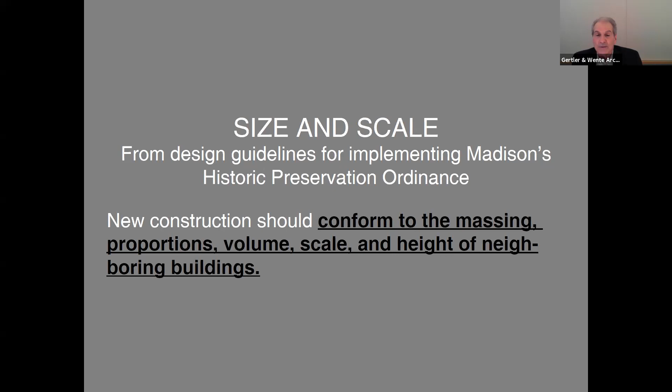When we look at Lincoln Place, we have an image showing a photo montage, taking a picture of each building and putting them to the right scale in terms of spacing between them, from Waverly Place over to Prospect. Our dilemma was that if we're supposed to use Lincoln Place as a jumping off point, we realized virtually no two buildings are the same—no two are the same height, no two have the same materials. It's really a hodgepodge of design for a street.

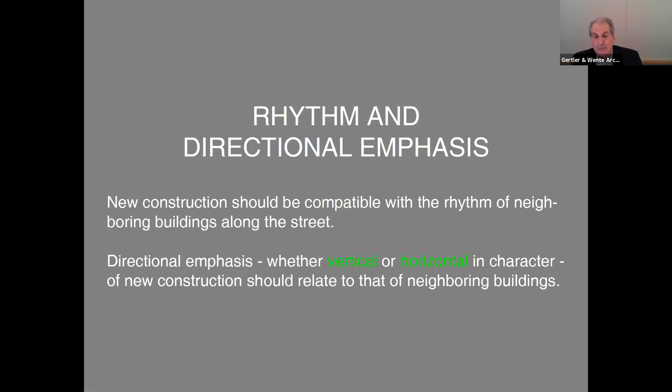So we looked at downtown Madison more broadly, and thought Waverly Place and Main Street were very good jumping off points. New construction should be compatible with the rhythm of neighboring buildings along the street. Directional emphasis—whether vertical or horizontal in character—of new construction should relate to that of neighboring buildings. So we looked mostly at buildings on Main Street, Waverly Place, and Lincoln Place.

We also looked at this on a horizontal band. Most buildings actually have this kind of horizontal banding. This is really historical architecture, where you have a base, a shaft, and then the capital. Most buildings have something like this. You can see buildings like the James Building, and down at the bottom is a very unique building, whose very top has a lot of different kinds of architecture, very different than, let's say, on the top right, the train station, which is just a gabled roof, very simple and clean. But the point is, we took our building and used the same theme, basically having a base, a shaft, and then the capital at the top.

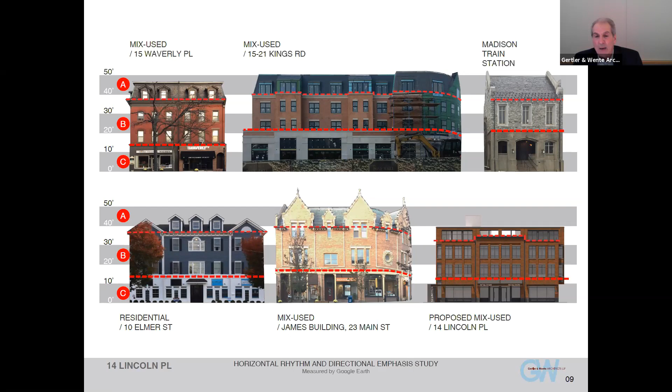Now let's go to other building elements. Window and door proportions, size, design, and pattern of spacing between openings should be compatible with historic treatments of windows and doors in the district.

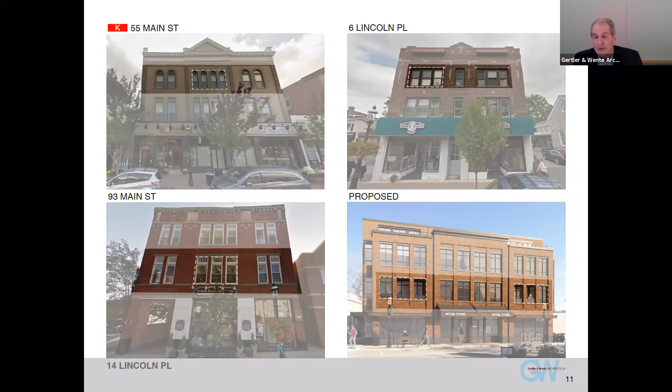So we looked at the basic windows. Most of the buildings in downtown Madison tend to cluster the windows rather than having punch-out windows. They tend to cluster them in groups of 2, 3, or 4. These are just some of many examples that do that. Ours on the lower right does the same thing, clustering windows of 3 on the far right and far left, and a cluster of 4 in the center.

Now, the heights of buildings in downtown. If you look at the overall Google Earth image of downtown Madison, I think most people would be surprised to see the amount of buildings that are about 40 feet and over. Most people think of Madison as a series of 1 or 2 story buildings, and that might be true, but here are about 15 or 16 buildings that are way over that, at least 40 feet and above. We just want to bring that to your attention.

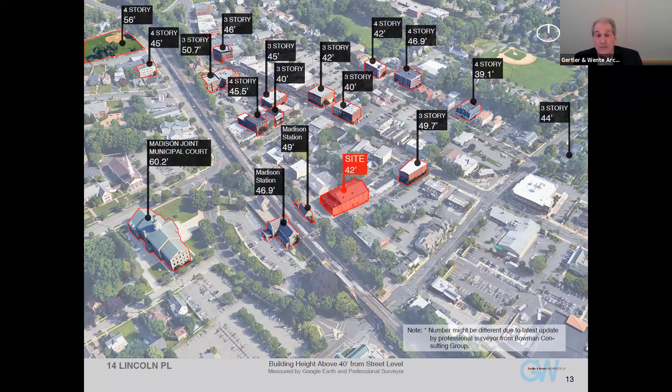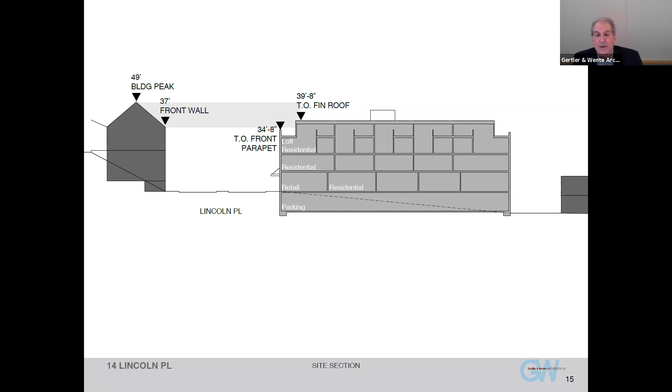Looking a little closer, when we look at the train station directly across the street, we tried to be respectful of that building. We see that between the gabled roof and the front face of the building, there's a 37-foot front wall. We took our parapet at the front, and it's actually lower, at 34 feet 8 inches. And if you look at the top of the train station building at 49 feet, we're in fact lower than that by almost 10 feet to the finish of our roof. So we're certainly lower than the building directly across the street. If you look on Lincoln Place and look west, you then get to see it in context with other buildings.

So when you look at the other direction, you actually see 6 Lincoln Place, whose height to its parapet is about 33 feet, 10 inches to the top. Our parapet is 34 feet, 8 inches, so we're within a foot of actually matching the height of the building along Lincoln Place. The eye perceives that as the first part of the building you see. Then there's about a 10-foot setback, it recesses back to the finished roof at 39 feet, 8 inches.

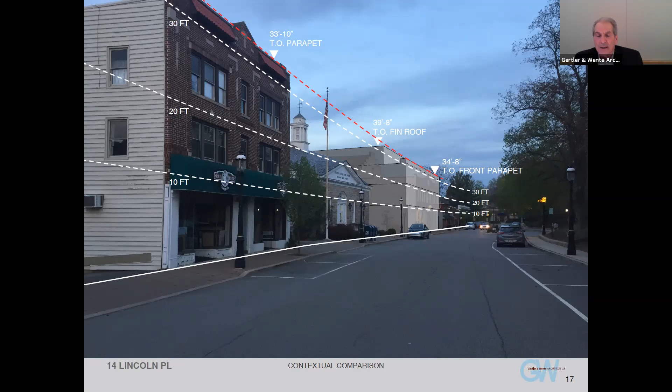And now we'll take you to the proposed plans of the building.

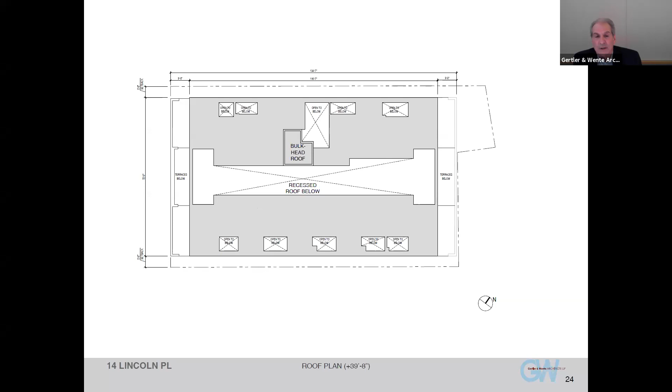On the roof plan, this shows the highest roof of the building, which is above the average grade plane. This is not accessible to the tenants at this level. This is strictly for maintenance in case there are any issues with the roof, shown in gray.

What I'd like to talk to you about is a unique feature we have in this building: a mezzanine, which is part of the 3rd floor of the building.

And what we found to be incredibly important in this day and age, particularly during this COVID pandemic, is something we've all gotten used to hearing: how many people have been moving out of apartments, whether in New York, Hoboken, or Brooklyn, moving back to the suburbs because they needed space.

What occurred to us was that most apartments have 8-foot ceilings, maybe 9-foot if you're lucky. They don't expand other than what you see to the walls on your left or right. But we were able to achieve in this apartment, while staying within the legal envelope of Madison zoning, the ability to create a higher space on the 3rd floor. That higher space is this loft space.

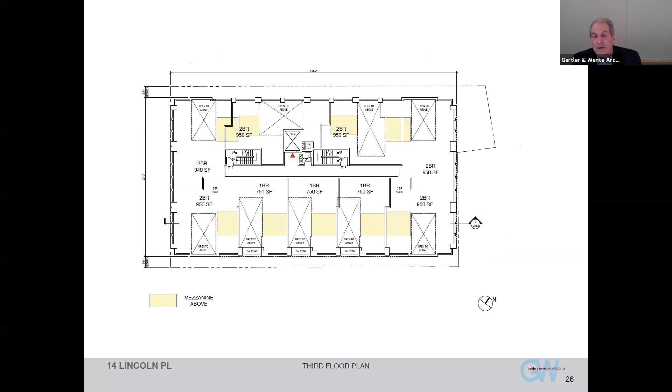When we look at a plan of the amount of square footage that the mezzanines are in relation to the floor of the third floor, the yellow represents the mezzanine, and they are approximately 120 square feet. They occupy very little space, but what happens to each of the apartments is that they have a double height space, just like our homes, and then a mezzanine space. So it all of a sudden becomes this unique and special place to live in Madison.

Besides it being a transit village, the perfect transit village apartment unit, it also was a wonderful place to now live, to have more open space, larger windows, more light, more air.

So again, if you are trapped doing your office work or your homework or whatever it is in this building, you can go outside and find your own little space up on the roof, whether it's yours or the public space, and you can stay here for a year. We think it's very compatible and desirable for someone to live here.

Mr. Stern also asked, can we take a look at the building if we cut sections through it north, south, and east, west? So if you look at it through the north, south section, what we see is all the mezzanine spaces that look down upon the loft spaces as well.

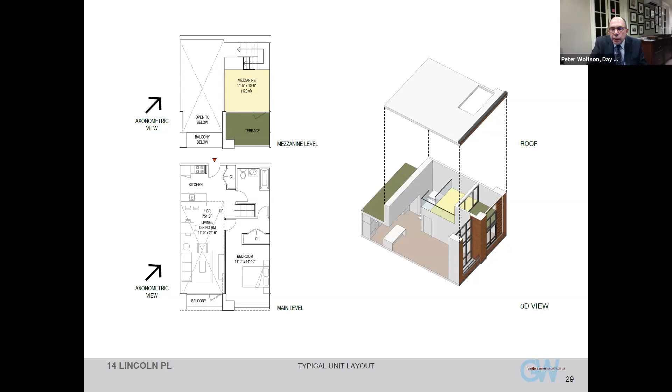We've done work, as you know, because of my— yes. If I can, just in context, Mr. Stern in his review memo raised the specter as to whether this constitutes an extra floor. So I just wanted to give the context. Is that right? Thank you.

Having done work around the country, we work with the code called the International Building Code, the IBC. The IBC is a compendium of building codes, mostly bordering on zoning issues as well, building materials, sizes, relationships.

It's a compendium of information put together by architects, engineers, planners, land use attorneys, anyone who understands how to build buildings and what is the right thing to do for the homeowner, for the renter, for the community. This is used all over the country, whether it's in New York City, in a big city, or in a town like Madison.

What happens is that the towns say, if there's anything very special and unique to my community, we will write something special to override the IBC. But if we think that the IBC is good, adequate, rational and reasonable in its thinking, we look to the IBC to provide that information to us.

What we do around the country, and every other designer does, is look to the municipality for what they state for their unique and maintained interests. When they are silent, that's the term used, when they are silent on a particular issue, it's understood that they fall back to the IBC.

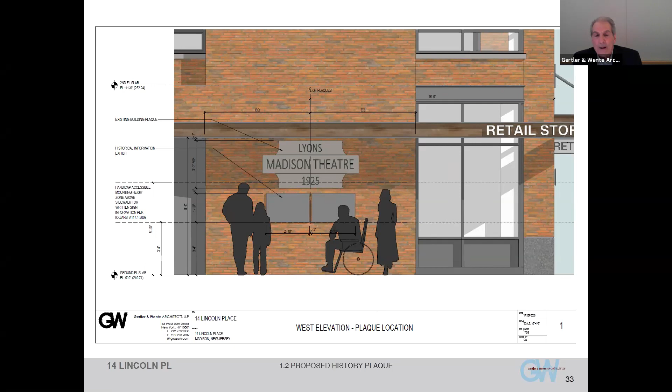We should honor the process we went through with the Historic Preservation Commission for a number of aspects of our design. Particularly the placement of the existing plaque, which is currently hardly visible on the front of the building, and the two plaques below it. The applicant hired a historian who worked with the HPC at quite some length to come up with text and pictures and other things that the HPC ultimately signed off on and was happy with. So there was an entire process, as the board may or may not be aware of, that this applicant went through to respect the placement of the property in the historic preservation area. What you see there, and in other aspects of the design, represents that process.

Well, we're aware of the mandatory conditions. Obviously, we heard the appeal of several conditions. The board should be aware, as I am as a board member, and the other board members are probably also aware of what the conditions were and the cooperation that was had around preserving certain aspects of the theater. Thank you. Subsequent to that appeal before you, we then worked yet further with the HPC on these details, so we're proud of the work that we did with them.

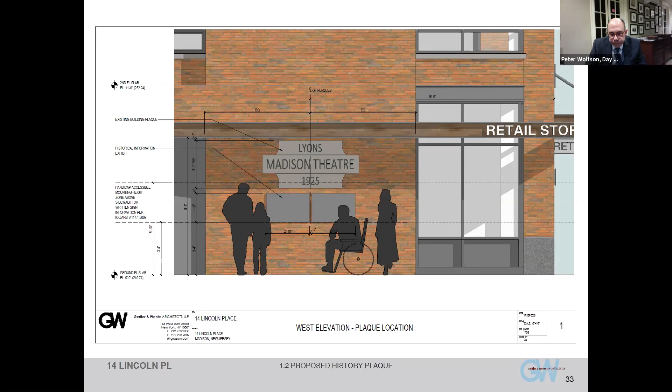Some of the other things we are using in the design of the new building: along the front of the building, and also along the side leading back to the entry of the residential units, we're going to match the pavers that Madison has as their standard pavers throughout.

Also, go ahead. Yeah, sorry, it's not moving on my screen. My screen is... oh, there it is. Thank you.

There was also a question raised about the HVAC units, or really the condensers, up on the roof. Someone asked, will they be visible from the street? But in actuality, they are recessed into the recessed roof, behind these walls you're seeing. That particular section has no window in it, it's just open, and it's also open above. So all the condenser units, you would not see them. Maybe 1% of them if you really took out a pair of binoculars, but you would not see any condensers sticking up top of this building as you see in other buildings. They're all hidden.

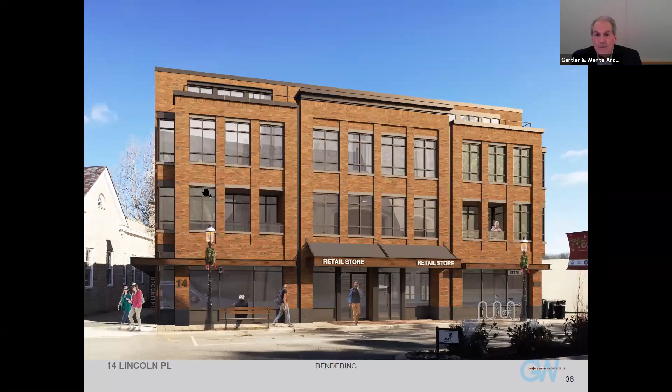On the front of the building, we wanted to make sure you know we're using the same bicycle racks that are the downtown standard, as well as a park bench we want to put in front of the building. The brick you see there is similar to the brick at 6 Lincoln Place, a little on the slightly brown or red side depending on the screen you're looking at. The building mostly is a brownish brick building, matching a lot of the brownish brick used in downtown Madison. We have metal windows that are powder coated in a grayish tone.

The canopy is also metal, but it's also infused with wood at the same time. We also have a canvas canopy in the center of the building, so the center of the building sort of stands out with a slightly larger canopy, as well as a slightly higher cornice right in the center as well.

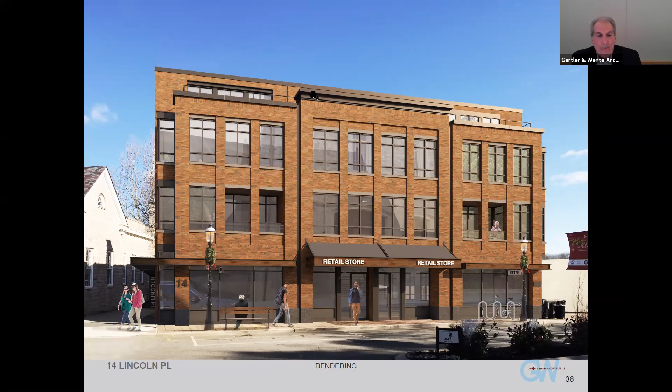Going back to the front of the building, I think this building will also help vitalize the downtown. You can see we even have some outdoor spaces on the 2nd floor of the building, so there might be people on their balconies who can overlook Lincoln Place as well.

That really concludes our presentation. Jeff, I have a few questions for you. You referred to, and we showed, the historic plaques and the work with the HPC. Additionally, pursuant to the HPC process, we're going to reuse an existing chandelier within the building, correct? Yes.

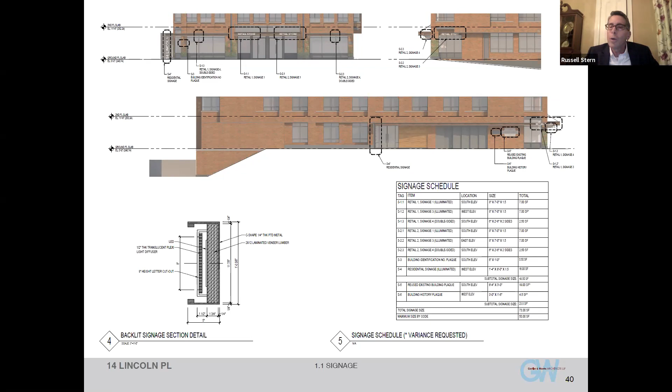Thank you. And then, also while we're on that slide, the drawings at least that I had received, it was just the print quality - you couldn't see all the contrast, and because of that it was hard to detect all the variety of building materials that you're proposing, such as on the upper left elevation. It's really not clear, and I don't think you detailed that out in your testimony about the building materials. It seems as though there's some type of base course there, and different materials that you're utilizing for the canopies. Could you go a little further in that explanation?

Sure, thank you. I wonder if maybe we bring up another elevation that's a little bit larger. Do it. Yeah, we'll use this one. Okay, Russell, it's a bit easier to see.

So we talked about the brownish tone brick and the powder coated metal window frames, which are both on the storefront windows as well as the residential window units. But along the base of the building, because of snow, salt, and the equipment that cleans them, we thought we'd put in sort of a granite base along the bottom of the building so the brick doesn't get damaged. We think the granite has longer longevity than the brick does, and it'll look better, so we put that along the bottom.

And along the signs where it says retail store, we wanted to introduce another building material. So in addition to the metal canopy itself, we introduced a band of wood that is recessed into basically a C-channel of steel for the canopy. So really the canopy is a series of wood, metal, canvas, and then the actual lit sign itself. No other real materials, except we hope to maybe have some planters in the front of the building - you can see a little bit of green poking through, and we hope to introduce some planters at the base of the columns. That's really primarily, if not all, the materials.

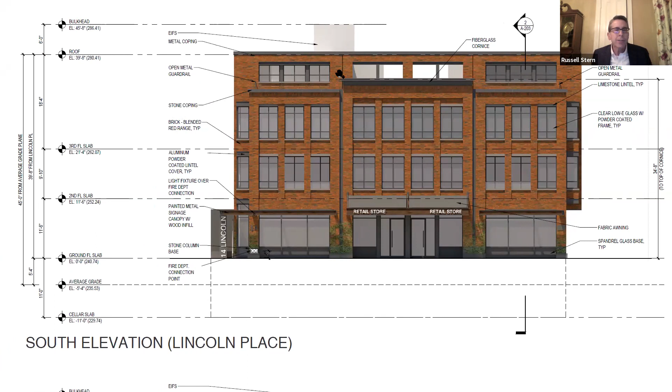Will there be other air conditioning condensers on that roof? There wasn't a detailed mechanical equipment plan for the roof. So why don't we do two things? What you're seeing now, where it says in that grayish zone, the only bulkhead we have that goes above the roof line of the building is only to serve the elevator that has the elevator overrun. That's all. I wonder, could we go to the plan for a moment?

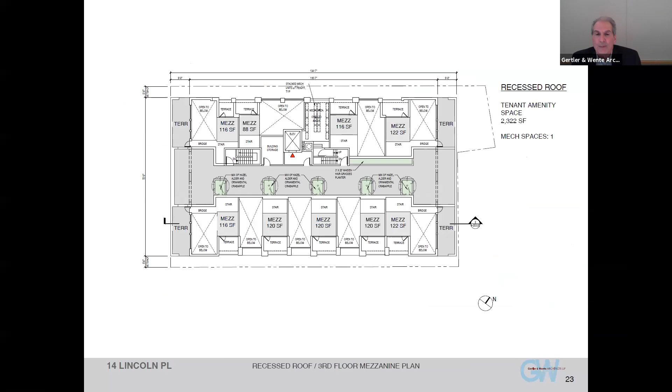I think it would be good to see that looking down onto the building. Right there, that's probably great. Can you just show the mechanical area? So that area is where all the compressors are. And they are, as you can see, recessed into the building, so they're not visible. They don't stick above the roof line of the building.

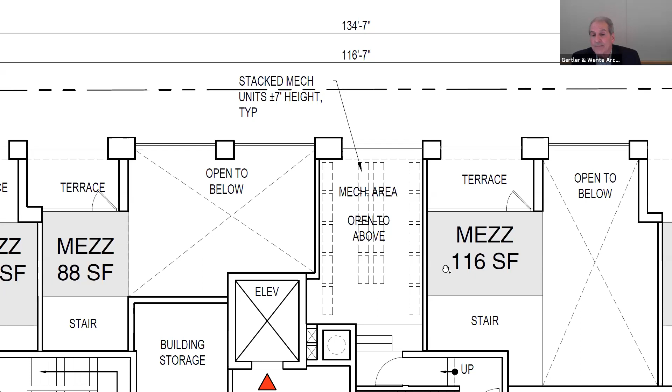From Lincoln Place, they virtually can't be seen. They cannot be seen from Main Street or from anywhere. I think the only place you could see them is a diagonal peek through from Lincoln Place, and you probably just see one compressor. You see that one little white strip in there? There might be a compressor over there that you would see.

So that's it. Then the bulkhead for the elevator, how's that exterior treated? You've depicted it in white. Would that be something that you just want to blend in with the sky or blend into the building? How is that taken care of? Yeah, good question. We'd like it to go away, obviously. So we thought a lighter color blending into the sky would be the way to do it. It doesn't look like it takes away from the rhythm of the building, it's something in and of itself.

And the material is EIFS, or is it a metal? Probably EIFS, something like that. It really won't—the way we're seeing this is, of course, a head-on two-dimensional view. The reality is that when you're looking at the building from eye level and in perspective, the edges of the building actually conceal the height of the overrun.

So the concern is that it's located across from the historic Madison train station, and there's another viewing platform there. Perhaps you could address the view from the Madison train station platform. How much of that is visible? Well, you'll certainly see it the way you see the roofs of every single building in Madison. We would not be an exception to that because we are not higher than the train station.

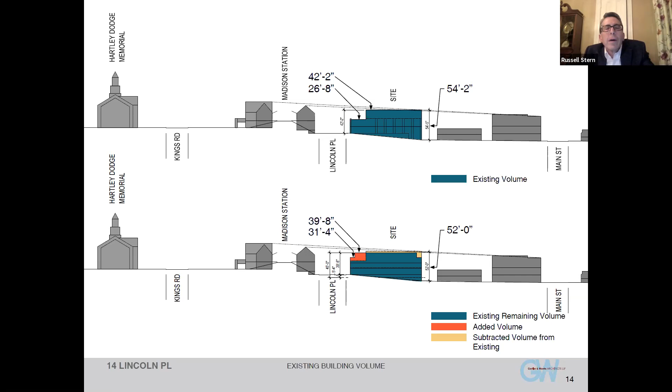Jeff, can you lead us through how refuse and recyclable removal operations will work? Sure, okay great. Before we get to that, can I just put one or two other things in real quick?

I just want to note, adding to what Russell had talked about, Mr. Stern, that we're in receipt of a memorandum from the Downtown Development Commission, the DDC, from Madison dated January 26, 2021. There were two memos from them, but the one that has to do with signage, the sign and facade committee, was received by the board. I'd say it was generally favorable, but we'll let them weigh in. There was one concern about the backlit illuminated signage that you explained a minute ago. I just wanted to say that at some point, maybe at the public section when they get a chance to talk, they can double back and we'll hear their opinion about the signage.

I wanted to say that when we did the appeal process and looked at all of the conditions, in particular the ones under appeal, I think at some point we're going to have to tie together with this application the mandatory conditions that were agreed to. Gary, you could comment on that, but there were a number of conditions the applicant did agree to. I just noted that mandatory conditions 5, 6, 7, and 8

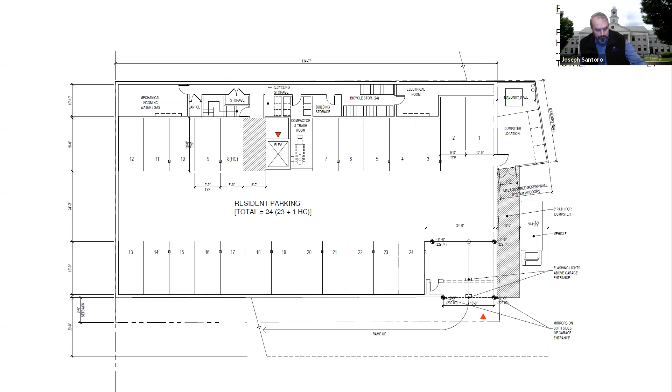That's it. Jeff, you're going to lead us. Are you done, Mr. Chairman? Yeah. Jeff, you're going to lead us through the refuse and recyclable operation?

And Jeff, while you do that, you referred to the fact that we're compliant under the ordinance in terms of being under the 45-foot maximum. Maybe you could speak to how the formula works under the ordinance and the calculation. Okay, that'd be great. Thank you.

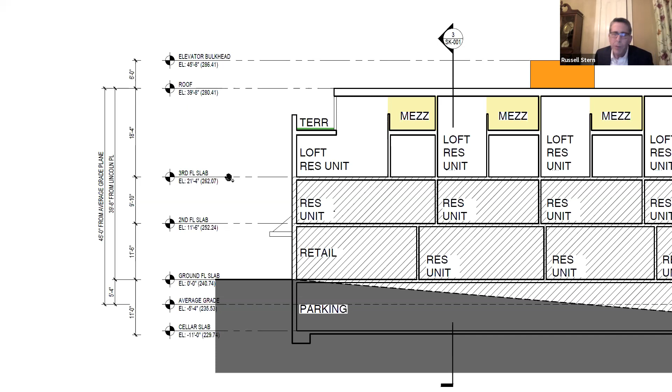And the mezzanine, you gave the figure at approximately 110 square feet? Well, they do change, that would have excluded all the decking. They change in size because they're allowed to be half of the area of the loft space itself. So you can see on this drawing, they range in size. 122 I think is the biggest one, and the smallest one is under 100. So they vary in size, between 100 and 120 roughly speaking. Okay, thanks.

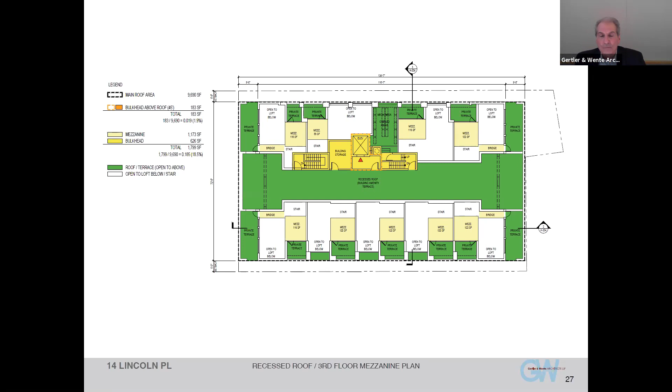Okay, back to garbage. Thank you for that intro, Peter.

Okay, let's start on the second floor for the sake of argument. The second and third floor is where the garbage emanates from, basically. In the center of the building there's a refuse room, and that refuse room is where there's a trash chute and a place to put recyclables. So tenants on the second and third floor would come to this room.

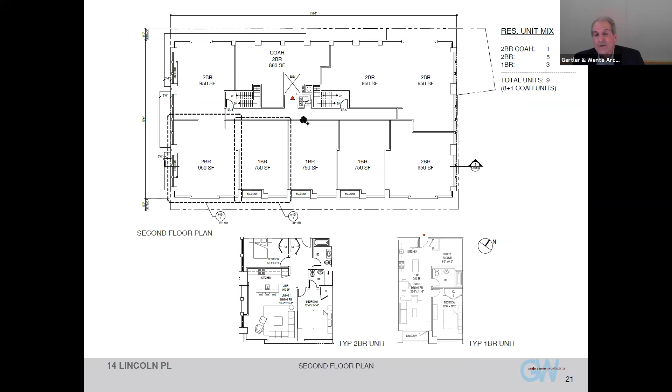They would put their trash into the trash chutes, and it would go down to the basement. They would put their recyclables into the recyclable boxes in the trash room itself. The trash goes down directly to the lowest level, to the cellar, and it goes to a compactor.

They're stored there until the garbage hauler comes. They'll come approximately 2 days a week. We had a conversation with them and talked about how many totes he might need, how many deliveries he might use, and we found this to be a more than adequate size location for all these totes.

What he'll do is he'll be backing his garbage truck down the alley, which he's used to doing. He'll park his vehicle there, and in 5 or 10 minutes, he'll take out the amount of totes that he needs down that hatched area.

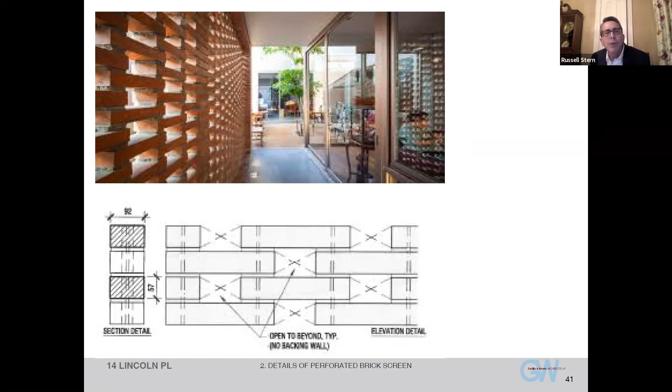There were, on one of those elevations, two gray squares or rectangles on the rear elevation. Right, I know there was some confusion. That's just because the section we cut through the building shows the earth, so we colored them gray as a result.

And then at that lower garage level, that would be the perforated brick material? That's correct, both on the side and on the back.

Mr. Gertler, with the open brick walls to the garage areas, are you able to maintain the required circulation for the underground parking area? With regard to an air system, you mean moving air itself, or the code-required open area or circulation air exchange provided for the garage space?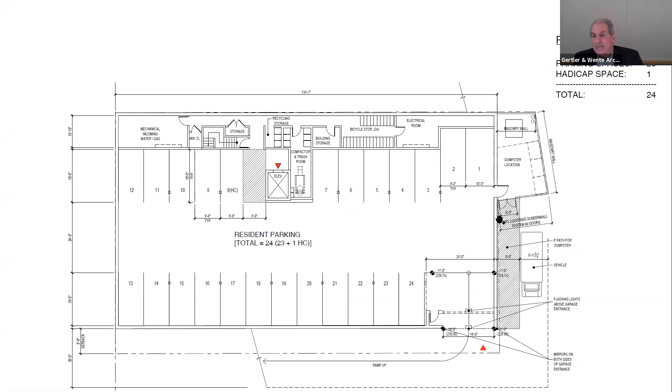And then on the side that actually faces the public, where the doors are, we would put in basically a metal grill — you've probably seen these. They're fins set on a diagonal, all pointed down, so you can't see through them, but there's airflow through them. They look like a very clean gray, powder-coated metal panel system, both the doors and the wall to the right of the doors, matching the same gray metal used around the rest of the building, so it becomes just an extension of the building itself.

So will that be shown on revised plans that will be submitted? Yes, and you can actually see it even on this plan — it says below that, 'metal louvered screen wall system with doors.' Okay, but I think we'd probably like to see a detail also. Okay, I mean this drawing has been revised since the last submission with that note. Yes, that's correct.

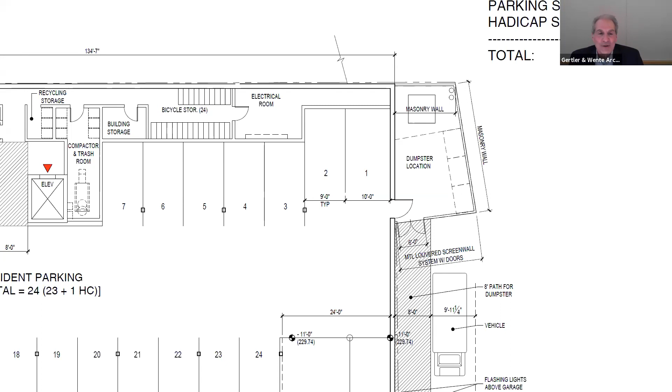Okay, and also, Mr. Gertler, you didn't mention your bicycle storage. Okay, so very good, thank you. So you could see on the same drawing — it's great, you can see bicycle storage for 24 bikes to the left of the electric room, right in there. So everyone has access to store one bicycle in the building.

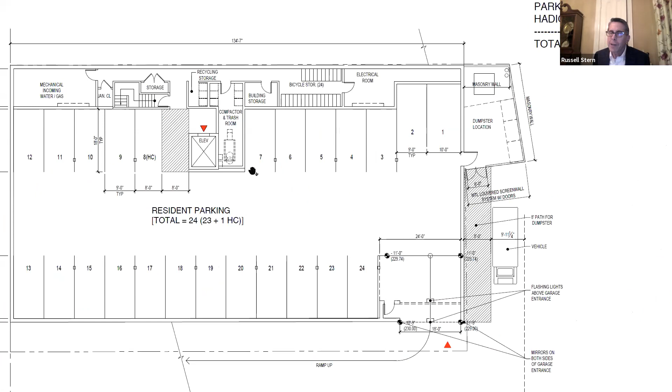And in your parking, are there assigned spaces, or are you only allowed 24 cars in there and it's everyone for themselves, since you'll only have 4 recharging stations and only 1 handicap space? How does that system work for parking?

Well, I think it'll be up to the owner eventually, but you're right — either each person gets an assigned space, which is probably the best way to do it so there's no confusion, or for the electric vehicles, if there are more than 4, that would be fantastic, and then we'll think about putting more in. I don't want to speak for ownership, but those are the 4 we're contemplating for EV vehicles.

And whether or not it's a free-for-all for the other spaces or an assigned spot, we think assigned spots are usually better so there's no confusion — everyone gets one spot. That determination has been made; they'll be assigned, Mr. Stern.

Okay, thank you, Peter. And maybe just installing conduit for future lines for the electric charging spaces may be something to take a look at. That would be easy enough — to put an empty conduit along that wall.

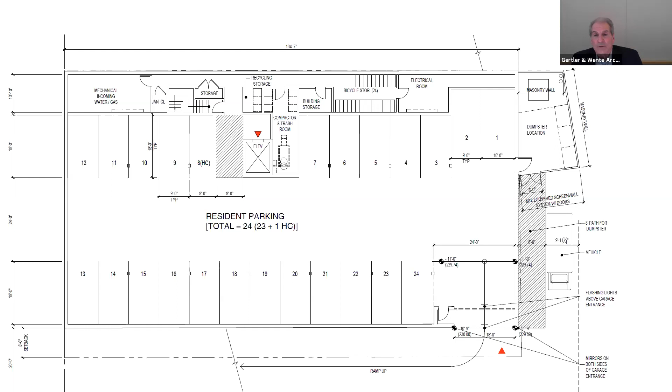Yeah, that's right. And was it that you're going to come back and discuss it with engineering, but there was a discussion about possibly widening the garage door slightly? Is that something you can talk about now, or that could happen later? I think I could talk about that. We looked at trying to do that, but the reality is there's a column — if you could show that, Shashan — right at the corner.

So there's a column to the building right there, so we really can't go further left. But what we do have—and I'll preempt a little of what Mr. Keller will say—is open brickwork you can see through, plus Eric will speak about mirrors we'll install, and also some lights so that anyone coming in or out will know another vehicle is attempting the same or opposite movement. We think with the multiple signals occurring to alert a car that another is coming, that should be adequate for vehicle movement.

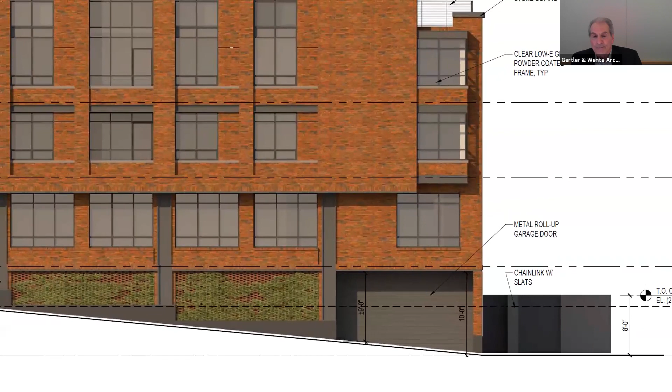What about the clearance height of the garage? I think I understood that might be an issue. Right, so someone raised a question—they thought we might need 10 feet to bring emergency vehicles in there. We thought the only way to know where the 10 feet came from was to go over to the Madison Ambulance Corps with a tape measure and measure the vehicles. So I personally went there and measured them, and the highest vehicle is 8 foot 2 inches. It turns out the lowest point in our garage door is also 8 foot 2 at that very corner—it gets larger after that.

I spoke to Lieutenant Longo about this, and he also acknowledged that 10 feet didn't sound correct, because it would make these emergency vehicles very top heavy, and you wouldn't want them on the roads tipping over. So he said he would go take a look himself to verify it. He hasn't gotten back to me yet, but he certainly will. That should be put in writing, his measuring of the vehicles also. But we feel confident that we're okay with the 8 foot 2.

So there's no code standard on that? Well, the code standard is actually for ADA compliant vehicles, of which we are over that—so we have more than enough room for an ADA compliant vehicle, like bringing in wheelchairs. But this was, I think, the question specifically for an emergency vehicle, say an ambulance, and we'd think you'd really stay on Lincoln Place for anybody rather than come down the alley and into the garage. You could just be on the street and come in and get out much quicker than this.

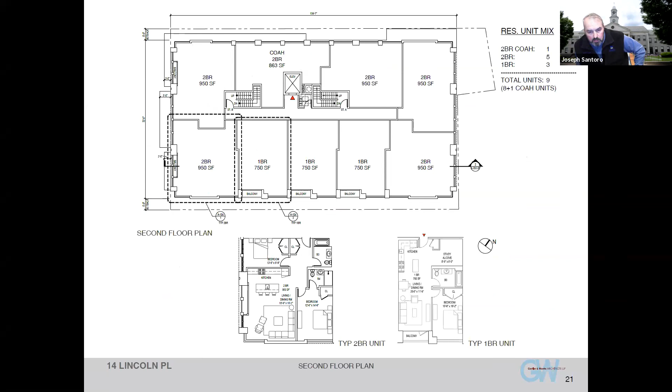I have another question for you, and you don't have to answer this now—it's meant in the spirit of being helpful, since I know you're considering a number of things you have to come back on relative to the parking back there and traffic flows. But it dawned on me that I think it's lot 12 that has the hydrant in front of it—actually it's on lot 11, but there's a hydrant that more or less blocks the parking. There's a fire zone in front of lot 12. You know what I'm talking about?

Yes, I wish we had a drawing in our deck that shows the location of the hydrant, though. Well, on the site plan there's a small structure on lot 12—it's got a fire zone in front of it, and there's a hydrant just over the borderline on lot 11, in the vicinity of that door there. And what I was going to mention is it's clear that parking must be an issue on that other lot, 11 and 12, because as Mr. Stern and I observed, people were parking in the fire zone there.

I was just going to throw out an idea - if you remove that hydrant to improve the parking situation back there, is it feasible to add a Siamese connection on the side of the building to replace that hydrant, which would maybe free up a couple spots? I'm just saying you can consider it, you don't have to answer now, but I'm throwing out an alternative that might help things overall. We'll certainly look into that. Okay, you don't have to do that, I'm just throwing it out there. Thank you.

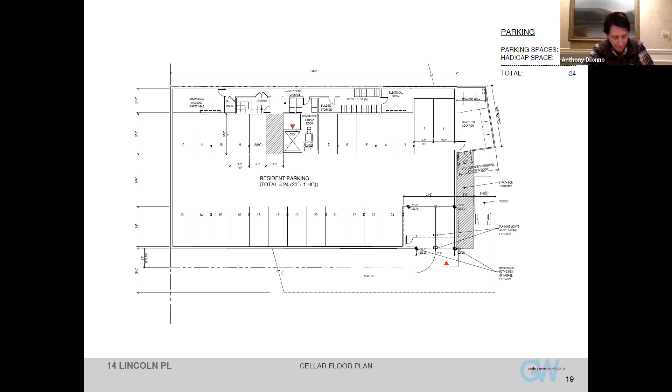As far as the story and the mezzanine, the floor to ceiling height is 11 feet 6 inches for the first floor, 9 foot 10 inches for the second floor, and the third floor is 18 feet 4 inches, which splits to 9 feet 2 inches if you cut it in half. So I'm wondering, in actuality is it basically 4 stories? I don't know if Madison has a minimum floor to ceiling height, and if that would be at or less than 9 feet 2 inches, or if that's a national code standard. So I'm wondering, is it 3 stories under a technical definition but 4 stories in the spirit of things?

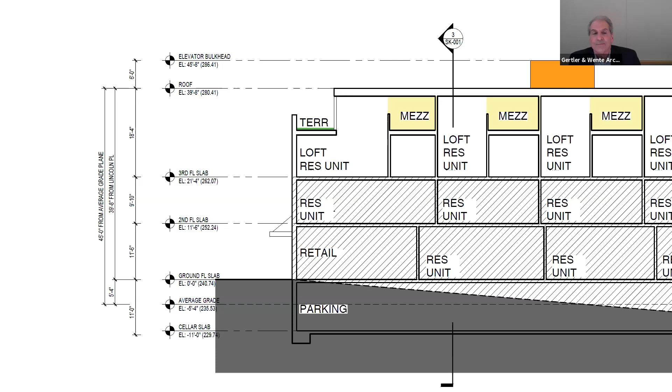Well, I think 7 foot 6 inches is the habitable height to make something legal for habitation, so we're above that, all the levels are legal and compliant. Okay, so if you split the mezzanine and loft in half, you'd have 9 foot 2 inches, well above 7'6", so you'd easily have space for 2 stories. Keep in mind the 18'4" includes the thickness of the roof slab - if you see where the tick lines are, really you have 17'4" between the floor and underside of the roof. Then roughly a foot of construction for the mezzanine floor, so you go from 17'4" to 16'4", creating a mezzanine of about 7'6". Even at 16'4", split in half that's 8'2", still over habitable.

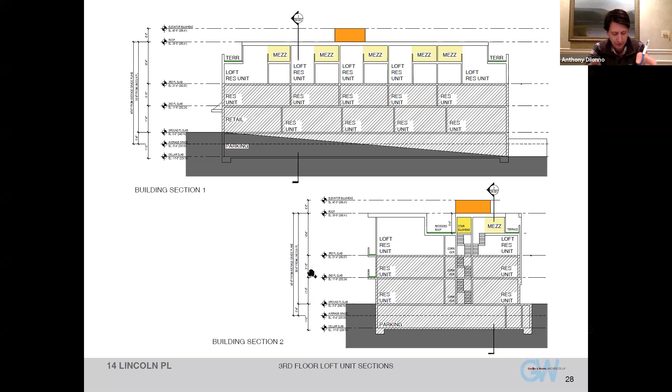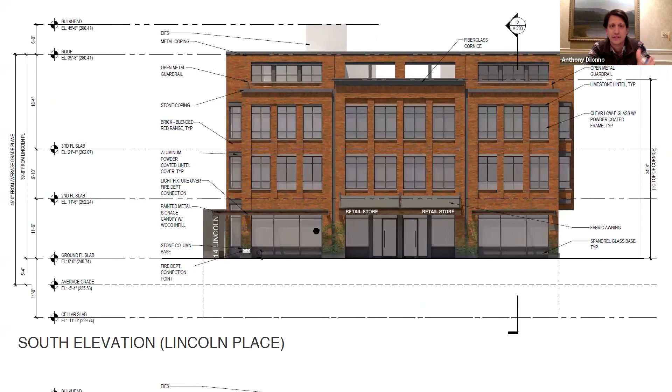Yes, right. The other question I had was about the 14 Lincoln side - if you're looking at the building to the left, it seems to protrude out a good amount. I'm wondering, is there a reason it needs to be so visible from the street, especially if it's backlit? That's just my opinion and question - it seems to come out quite far.

Right, no, that's a very good observation. The reason for that is it actually comes out to the property line. If you look behind that wall - Shasha, can you go to that other drawing, the perspective - you'll notice there's a little planted area behind the signage, and that planted area is where there are residential units. So we don't want people walking there and looking into people's apartments. We thought we'd put a boundary at that point as a line of do-not-go-beyond to create privacy for the residential units. So the sign sticks out to where people can't really get past it to those residential units. Exactly right.

And I thought it was interesting that you came up with that - call it a model of the ticket booth. What did you call that? It's a relief. I think people are familiar with these reliefs - it's like half of a sailboat you see in people's homes often. You take a slice of the front and see the image without the pure depth of it. You understand exactly what it is by seeing the first 6 or 8 inches, compressed. So you get the feeling of what the ticket booth actually was without building the entire thing. Okay, great, I didn't understand what that was when I saw it on the plan, but that's very interesting, kind of like that.

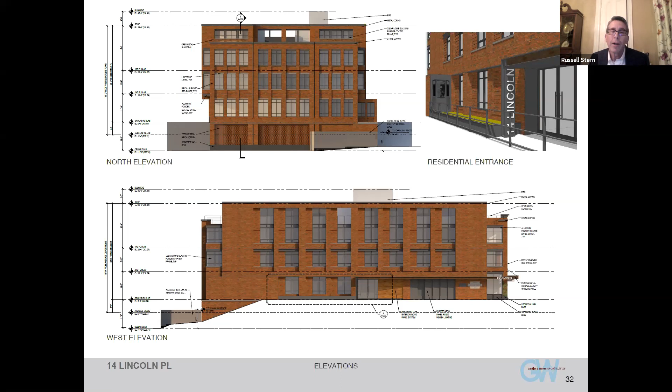So I stand by my position that this is a variance that's required. Okay.

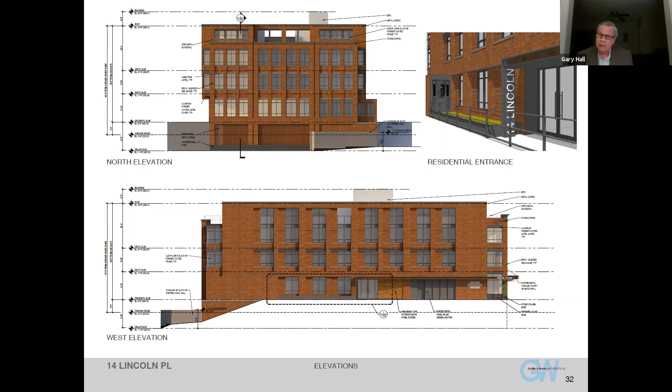And Joe, I had a couple real quick questions. Yes, sure, certainly. If we could go to the solid waste drawing, the last one, the cellar floor plan?

Basement level, showing the enclosure in the back. Yeah, that was it. I just want to make sure I'm clear on this.

So the striped area, is that going to be signed as a fire zone, fire lane? We would like to show that as an area where no vehicles will be parked, and no refuse will be put there, and that it's an open area in case of any emergency. And then obviously we could move our refuse through that space freely as well.

So on the drawing, that would be striped? Yes, it could be striped. We would like to do that. I mean, you show it striped.

I guess that area is covered by the easement agreement, and I suppose you could make that a provision of the easement agreement. I know it's not your property.

That's a legal question for Mr. Wolfson. Yeah, that's part of the discussions that we're having with our neighbor on that. So we're working through all of that.

On that, the truck that's shown there—I think somebody was talking about there being a truck back there all the time. Yeah, we're talking to the neighbor about that and making sure it's in a position where it's not interfering with anything. Okay, that's fine.

Now, the other thing that came up last meeting, in the corner behind the solid waste dumpster area, there's a square labeled as a transformer pad on some of the plans. Correct. Can you talk to that, Jeff?

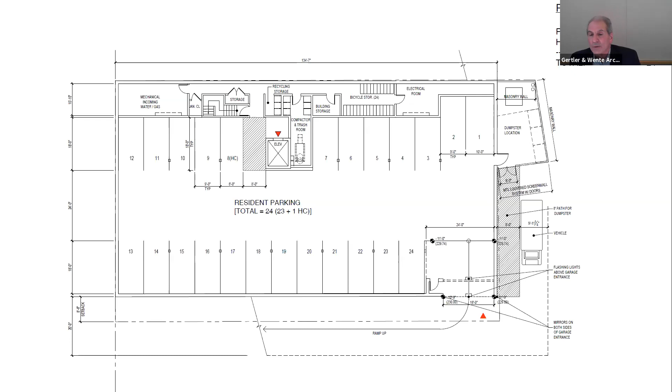Will it be in this location or another one? Don't know yet, that hasn't been engineered, but we certainly have space—we have that electric room and the outdoor space already anticipating something like that. To the extent that the Madison Electric Utility wants a transformer, we will work with them to provide one.

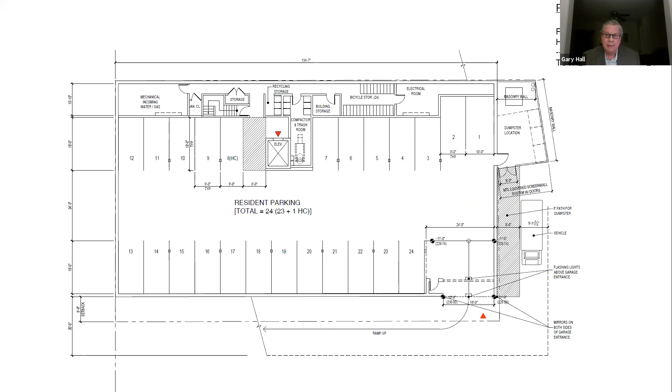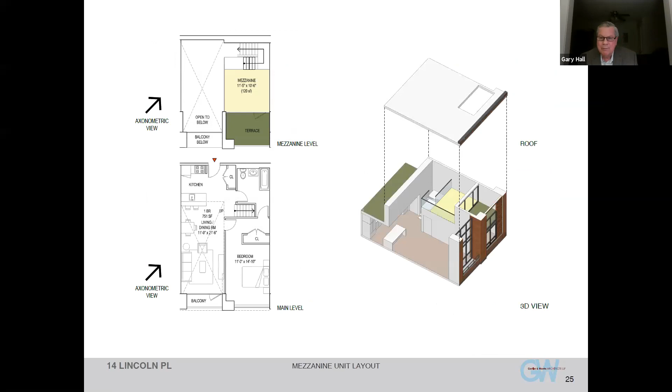The last question, on the front elevations there seem to be conflicting views about balconies on the second floor. Like that one, you just see windows on the second floor. Now there's another one that shows balconies or terraces, and that seems to show on the floor plans also. I don't know that I care, it's just they're not consistent, I don't think.

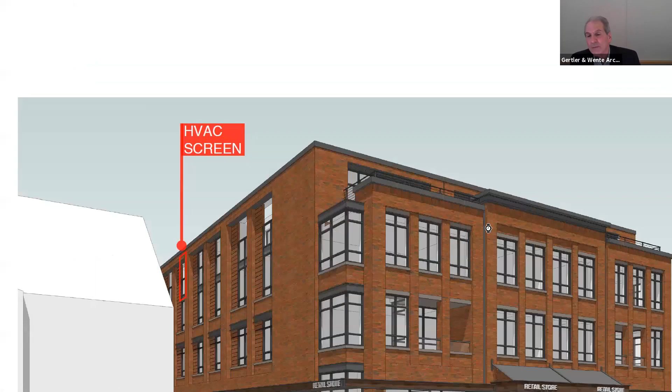If you look at this elevation - yeah, that one - it's a little hard to see. There's another one that shows it that way on both sides in the front. This only shows one, it's over there too. It's hard to tell, it's in perspective and not a highly rendered drawing, but what you're not seeing is that the walls actually do go back and then turn, so you can see it on that one more easily. On the right-hand side you can see the window on a slightly different angle - it's mullions, hard to pick up at this scale. You see that setback in there?

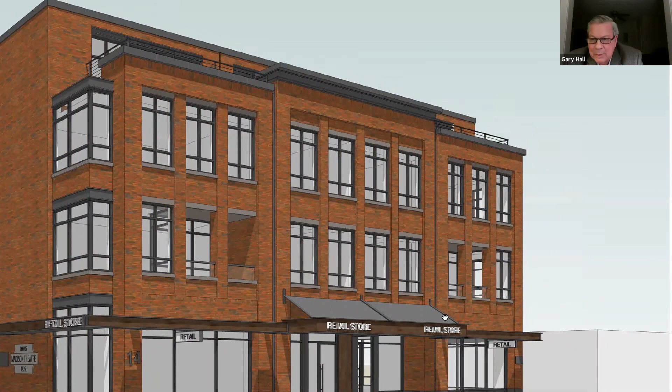Yeah, there's another view and you can see there's a fence or barrier, a rail, on top. You mean it's not a big deal - I was just confused as to what the plan is, and maybe it impacts aesthetics, maybe it doesn't. Well, the plan is to have an outdoor space on those two apartments on the far right and far left. Okay, that's fine if that's what it is, it just didn't look that way on some of the elevations. Okay, that's all I had.

Are there any further questions from the board? I had one - is it possible to give a streetscape from the train platform and/or train? It seems like a lot of the visual aspects would be kind of from that. We're talking about mezzanines and a lost elevator shaft - most of that's going to be viewable from the train station and the platform. Is it possible to give a view? I know not tonight, but next meeting or a subsequent meeting?

It is. And I must say we've been looking at this for a number of years, and I take the train into Manhattan every day. I've often looked from the station level, to the platform level, to this site. What's really remarkable, and I think it behooves you to take a look at this too, is that most parts of the year the leaves conceal most of the view. Actually, there's not a lot of view from the platform. Now is the best time to see it, actually, and even now you'll see there are very obscure views through these openings.

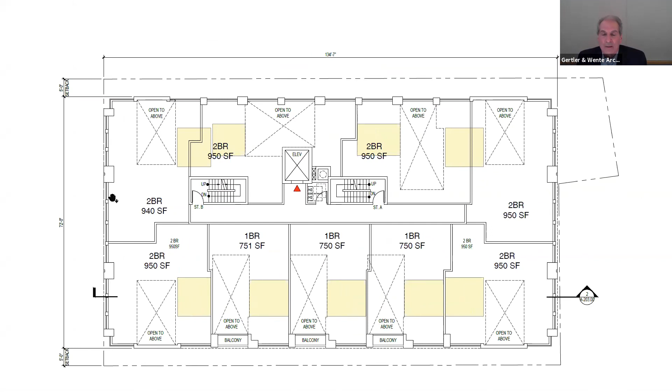And the dimensions of the building along Lincoln Place are about 70 feet, I think. And front to back, we could just ballpark it if you like. I just want to know. So 130 times, let's say 70, so say it's 9,000 square feet of floor. So you've got 3 floors, 27,000 square feet. It's just a ballpark, so the total building you believe is 27,000 square feet.

Again, you asked me to ballpark it, so I would have to. Ballpark, right. Now, and that doesn't include the parking garage floor, correct? Well, because that's a cellar, so you don't count that. That's correct, it's not a floor. Right, so how many square feet is that? Would that be another 9,000? It would be the same, yeah, thereabouts.

And the 9,000 per floor, does that include the mezzanine on the 3rd floor? No, the mezzanines, as I showed, they're about 100, let's say 110 square feet each. And there are, I think, 7 of those, if I got that right, no more. So say it's at most another 1,000 square feet to the building.

1,000 square feet? Okay, so in total, it's a very small amount. When you think about a house that's 1,000 square feet, you'd say, wow, that's not even large enough to live in. So we're talking about all the mezzanines in total being under 1,000 square feet. I think it's good to think about that in terms of what a house is. A small house is at least 2,000 square feet, right? So we're talking about less than half the size of a small house.

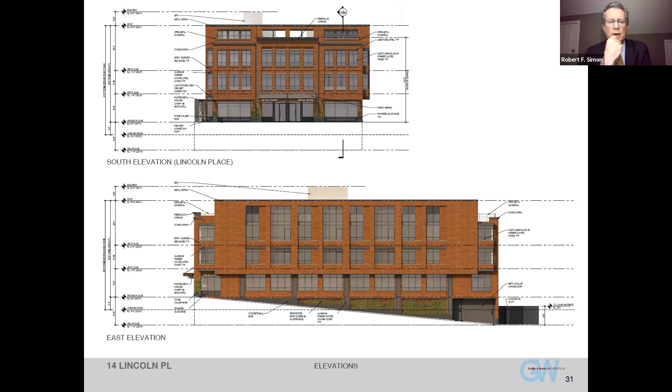Because I didn't see one. Shall we show the first floor? Yeah, we'll show that to you right now. So here's the first floor, and here's the 3-bedroom COAH unit.

Why don't we blow that up on the lower right-hand side? I saw that one, Jeff. I was talking about the 1-bedroom and 2-bedroom COAH units. Have you had... Well,

We didn't design all of the units. We designed a lot of the representative ones. But the size of the units are really no different than many of the other units. If you can see the 3-bedroom, it's a very spacious 3-bedroom COAH unit. I think anyone would want to rent that, whether it's market rate or COAH.

Actually, I would love to live in an apartment that size. I didn't when I was growing up, I'll tell you that.

It looks like the 2-bedroom COAH units are 850 square feet, and the market rate 2-bedrooms are 950 square feet. No, well, that's the code, 850 for COAH units. That's correct. But you don't have to keep them at 850. That's just the minimum, right?

That's correct. Make them the same size as the market rate units, right? You could. And there's no COAH units on the 3rd floor with the mezzanines, right? That's correct.

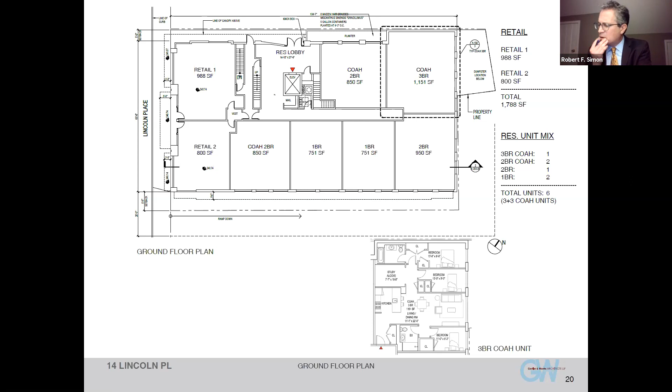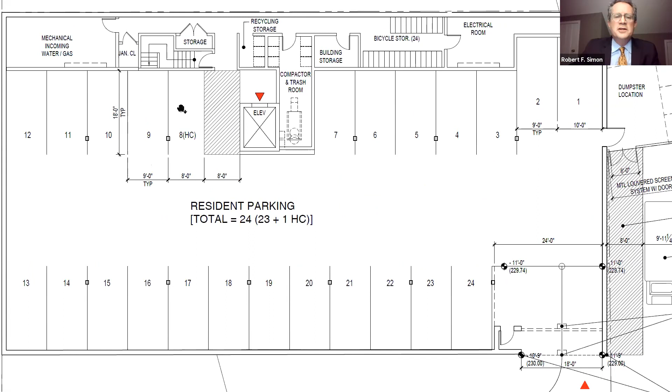How much space is there between the columns and the garage? Could we go to the garage for a second? Can you blow that up? So we have approximately, let's say 18 feet would be probably a typical dimension. Right, like you see between the two columns what I'm talking about, because it seems to be less than 18 feet. No, each parking stall is 9 feet.

It's typical. Right, but I'm saying if I look between stalls 5 and 6, there's 2 columns right on either side, and what is the width of those columns? Because it seems to me that would result in less than a 9-foot stall on either side.

Well, obviously, as you know, a car is about maybe 6 feet wide, and when it pulls in, the doors are not going to be near those columns. So it should not be an issue for a car to pull in, open up its doors, and people to exit out. It's pretty straightforward. It's very common in buildings that have parking underneath, because there are usually columns that are within the parking structure.

Okay, so you're not requesting any relief in connection with those columns, right? No, we're not. And where is the handicap space, in terms of?

Oh, there it is. Okay, number 8 is the handicap space. And you stated earlier that each unit's going to be assigned a parking space. What happens if no unit qualifies for a handicap space?

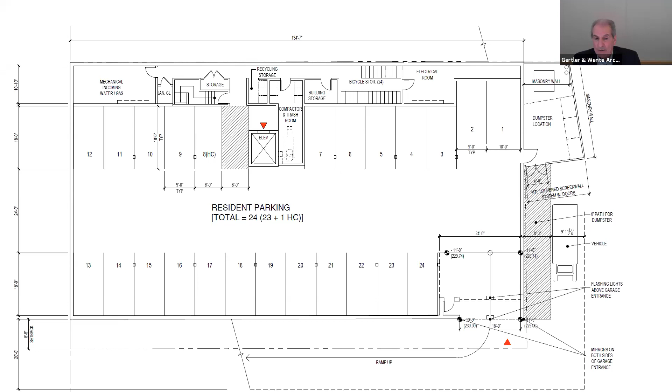Well, then parking spot 8 would be given to another unit. Are you saying if there are no people who need a handicap space, who would be given spot number 8?

Yeah, if spot number 8 is the handicap spot, the point being is that we have a deficiency of parking and you're proposing 1 space per unit. And what happens if none of the units qualify for a handicap space?

I think we're going to have our traffic engineer hopefully this evening available to answer traffic engineering questions. Okay, I was just asking in terms of the assignment of space issue. That's Peter, I'll defer it to Mr. Keller, but just to the extent that the architect knew the answer.

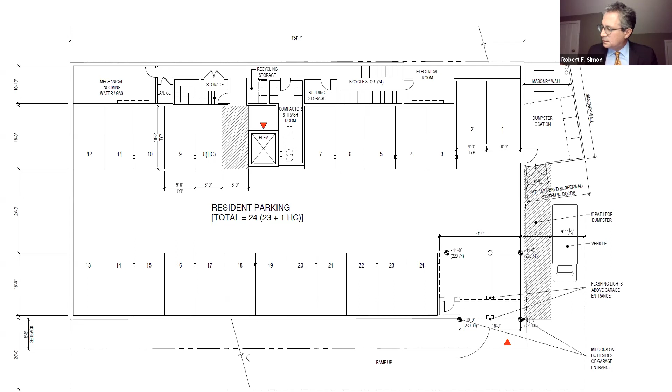That's why I asked the question. Okay, and that's it. Thank you, Mr. Santoro, thank you very much. Okay, so at this point we will go to the public for questions. Hold on a minute, let me grab something I have here.

Okay, so we're going to end up going to the public, and I just want to state to the public that this is an opportunity for you to ask questions. There will be, after each witness, the public will have an opportunity to ask questions. So this is the first of those opportunities that have come up, but there will be for the engineer and the planner and so forth. And then at the very end of the application, after the presentation, the public will have an opportunity to make a statement either in support or opposition to the application.

So really, this is an opportunity for you as a member of the public to ask questions. So kind of dig a little deeper on things that maybe weren't talked about or you want to understand better, that sort of thing. But it's not the forum to say that you hate it, you love it, you want this, you want that. It's really about questions, so I'm asking you to try and stick to that.